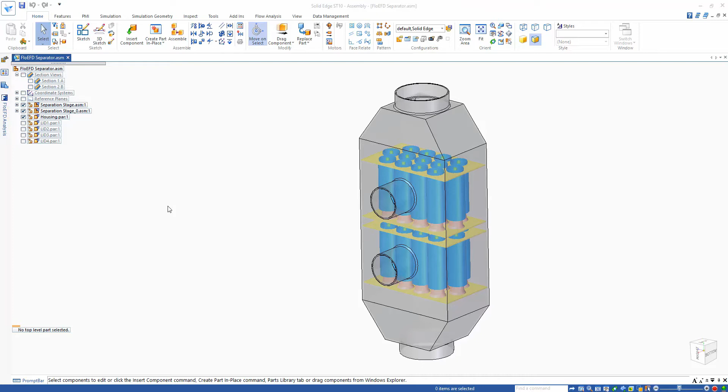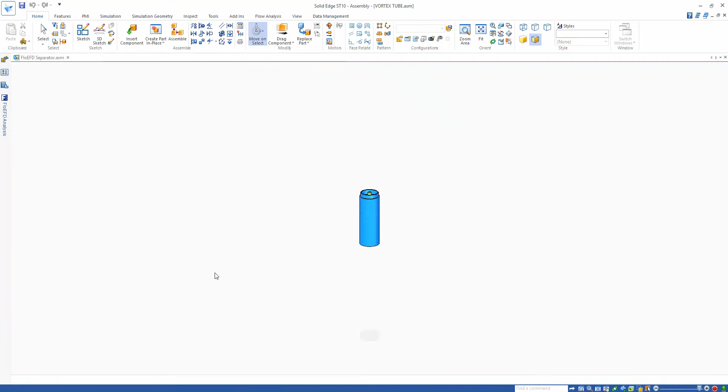Hello and welcome to this FloEFD example where we're going to be looking at a cyclonic separator, where we have an air inlet, two outlets for the cleaning stages, and a third clean air outlet. This is a passive device using vortex technology. Let's look at some of the design behind this particular separator. You can see we have a single spiral that forces air towards the outside of this vortex tube, so particles are flung outwards and separated from the flow as it goes through the device.

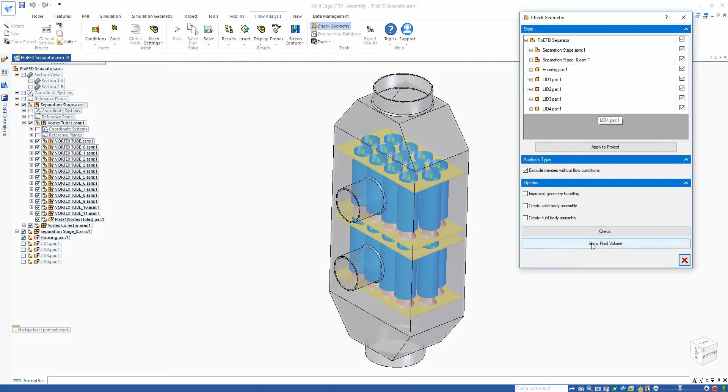In FloEFD we can check the geometry to ensure we are getting the correct fluid region in the model, so the air volume is correct. You can see on the screen this blue volume, which is the correct air volume, so we're ready to go.

Let's go to our FloEFD analysis and look at some of the setup. Here, first of all, we have 100 CFM on the inlet. We then have 3 pressure outlets: the first stage of cleaning, the second stage of cleaning, and hopefully the last clean air stage right at the bottom.

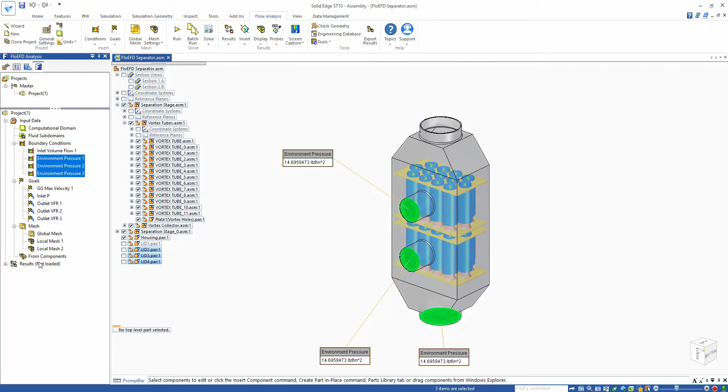So let's load the results. First of all, let's take a cross section. We have that there, and we can have a look at what the computational mesh looks like.

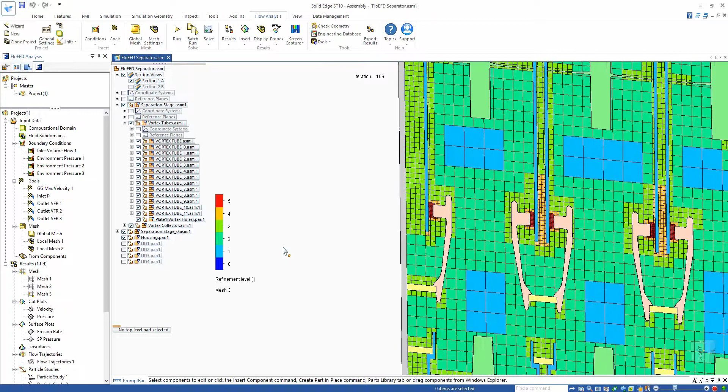FloEFD uses a finite volume mesh, and you can see we have coarse regions on the inlet, medium regions around the spiral, and a very fine grid region in red on the outlet of each vortex tube, which indicates our separation zone as particles stick to the outside of the vortex tubes. That's what the computational mesh looks like.

Let's have a look at the velocity through our model. I can probe that now and get a feel for what sort of velocities I'm going to be getting through the model. We can see velocities, and on the outlet as well I can see what sort of velocity I'm going to be getting.

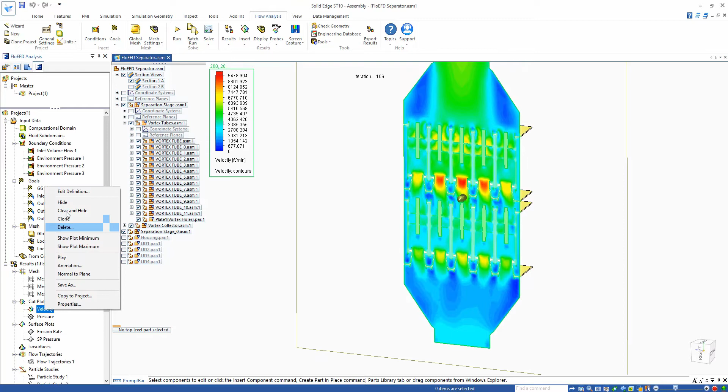We can also have a look at what the flow pressure looks like. To maintain that 100 CFM, what's the delta P got to be? We can see the inlet pressure and the outlet pressure, so maybe 0.18 psi or so upstream pressure required to maintain that 100 CFM through the unit.

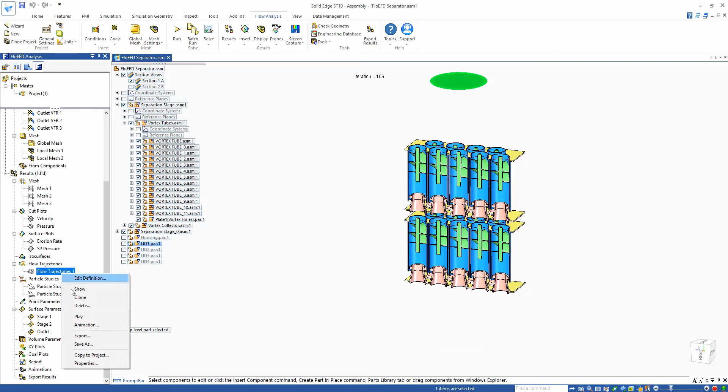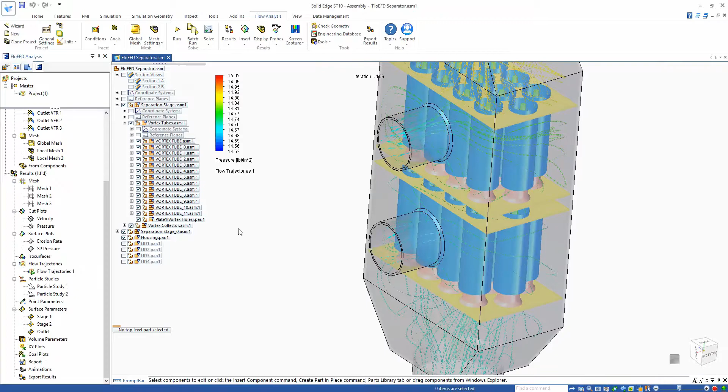We can introduce and look at some zero mass particles into the flow just to visualize what the airflow looks like. You can see we can play these, bring back the housing, turn off the section, and see what the flow trajectories look like as it goes through the model. I can take this section like this and we can see the flow with these zero mass particles.

Because we want to understand what the separation efficiency actually looks like, we can use something called a particle study. Let's activate this particular particle study. Now I've got 3 injections: 50 micron, 5 micron, and 0.5 micron injection into this model.

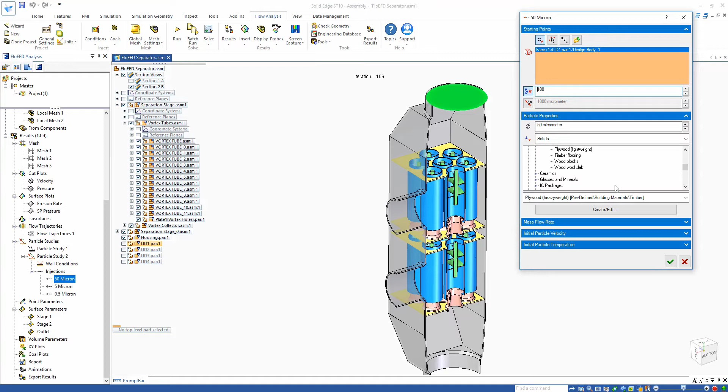If I just edit this, you can see this is going to be a 50 micrometer, 1,000 injections, and I've got a plywood material on here at 50 microns, and we want to understand what the flow looks like. So let's just activate this.

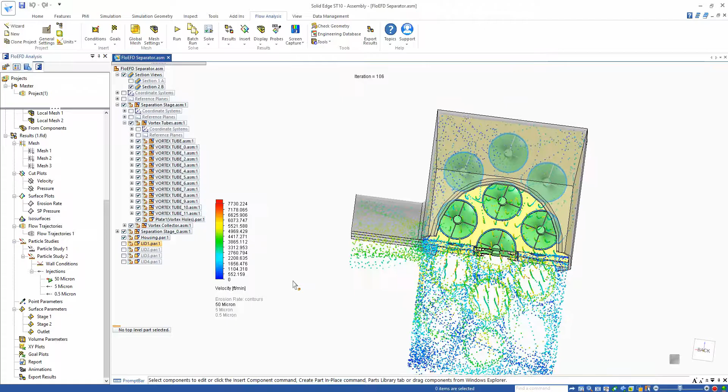If we show that now, we can see the particles coming into our model, colored by velocity. You can see the swirling effect as it goes down, and how they're sticking to the outside of these vortex tubes. There's no moving parts in this, completely passive device. You can see how it's being separated and moved out towards the outlet of the first stage. A little bit gets through to the second stage, but not as much as the first stage. So the separation efficiency is pretty good for 50 micron.

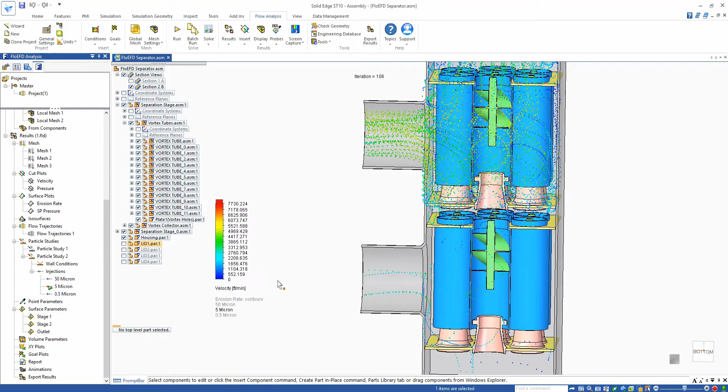Let's have a look at what happens at 5 micron. We're getting a little bit more. The first stage is taking care of most of it, but the second stage, a little bit more is getting through this time, and then finally a little bit more getting through out towards the outlet as well.

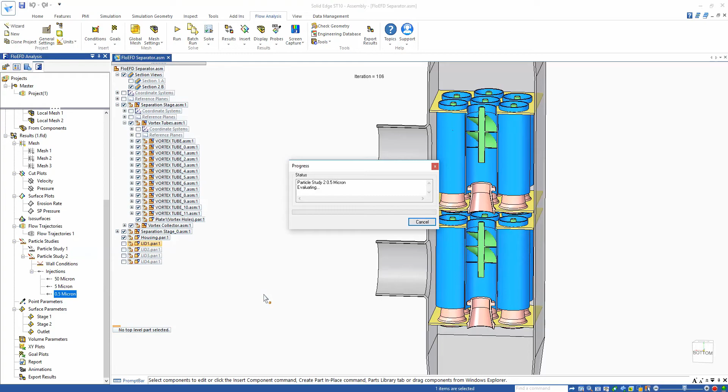And then finally, let's have a look at 0.5 microns. What does that do? We get a lot of separation in the first stage, a lot more going through to the second stage, but at the last stage there simply isn't enough mass in those particles, so the separation isn't as great for these 0.5 micron particles going through our separator.

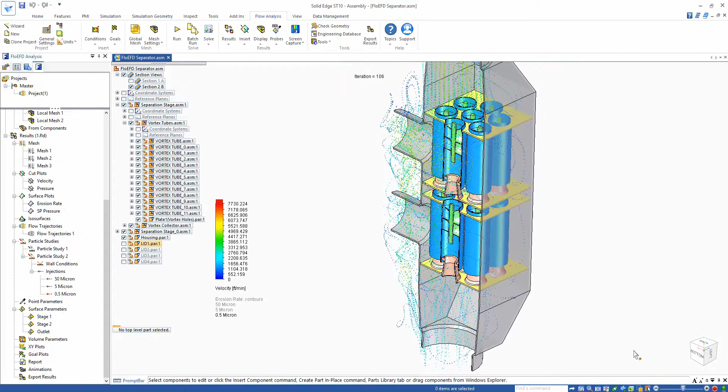So we can get a feel for exactly how good the separation efficiency is. The way to visualize that is to use surface parameters. If we look at our stage 1 and show that, we're removing 98.5% of 50 micron, 93% of 5 micron, but in the 0.5 micron we're only removing 32.4% of those particles out of 1,000.

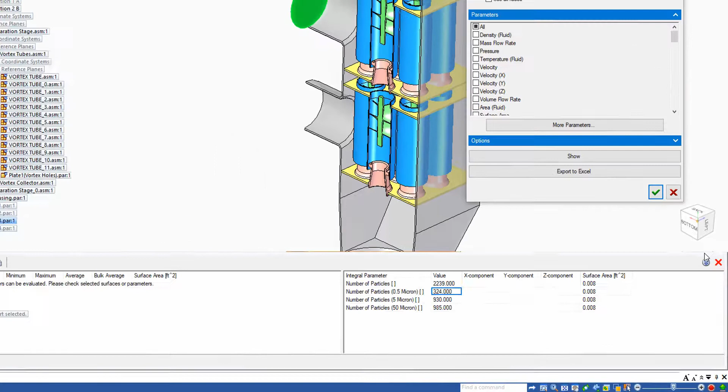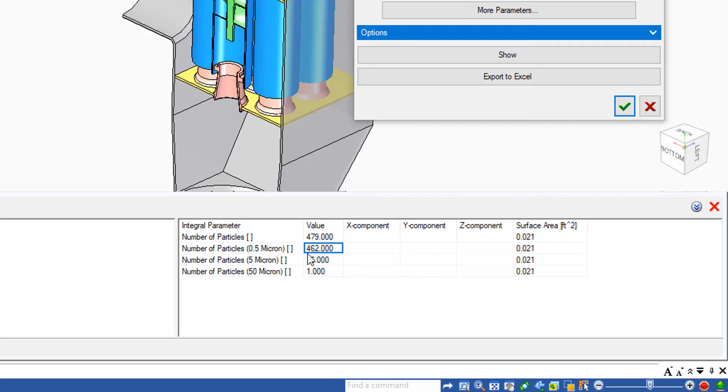And then finally, if we look on the outlet to understand how many particles are going down there, we can see that only 0.1% of the 50 microns are getting through, but for the 0.5 micron you can see 462 of the original 1,000 particles are getting through. So only a 53% separation efficiency at 0.5 micron.

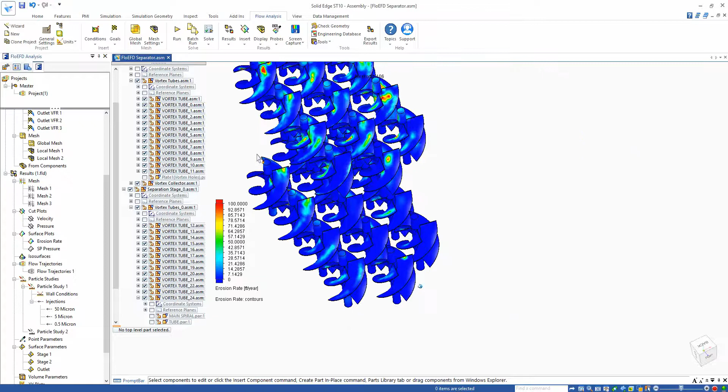Finally, let's see what sort of erosion rate we're going to be getting on our spirals, to see how many particles are actually hitting those surfaces. If I hide the geometry, we can now see, due to the top section there, what sort of erosion rate occurs. The outer ones aren't getting as much as the inner ones, but that shows you which particles are hitting which surfaces and where, and how badly the wearing effect is going to be due to the particles going through this particular system.